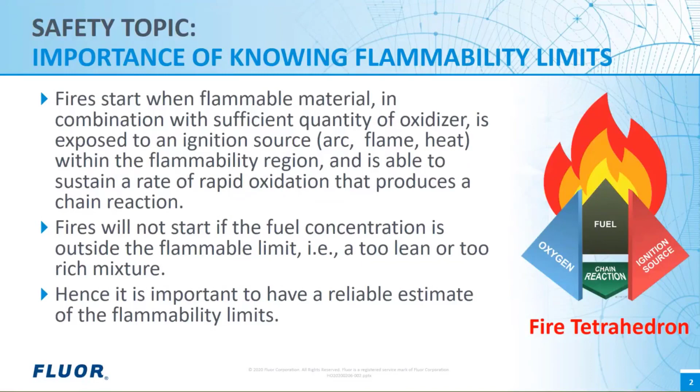This technical presentation highlights the value of accurate thermodynamic modeling on process design and safe and trouble-free operation. As safety is one of our core values at Fluor, we will start with a safety topic about the importance of knowing flammability limits. The fire tetrahedron has replaced the fire triangle to understand the ingredients necessary for most fires. A fire requires an ignition source, oxidizer, flammable material, and a chain reaction to sustain the oxidation. The concept of flammability limit is important to understand because fires will not start if the fuel concentration is outside the flammability region. Our speaker, Paul Mathias, will talk more about flammability limits in his presentation shortly.

Paul Mathias is a chemical engineer with over 41 years of broad experience and an expert in applied thermodynamics and process modeling. He started his career on the Aspen project at MIT, which developed the forerunner to Aspen Plus. He worked at Aspen Technology before joining Fluor in 2005, and Paul has chaired sessions at the American Institute of Chemical Engineers and other technical meetings, and was selected as an AICHE Fellow in 2015. Paul is also a Fluor Senior Fellow and has 6 patents, over 90 publications, and has given over 130 technical presentations.

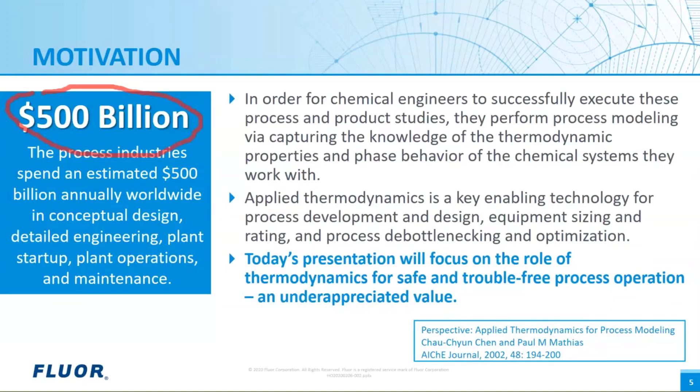In today's webinar, we will present 3 case studies to highlight the role of applied thermodynamics in achieving safe and trouble-free process operation. In the conclusion section of our 2002 perspective, Chau-Chyun Chen and I wrote that applied thermodynamics will continue to provide value to chemical engineering by focusing on the needs of practicing engineers. We chose these 3 examples as we feel they will be of interest to practicing engineers.

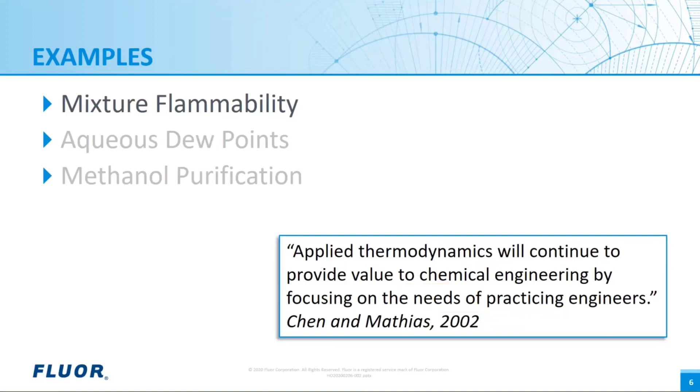Let's now move on to the first case, which is the study of mixture flammability. Fluor received this query from a client to evaluate the flammability risk of a fairly large lab reactor developed for the purposes of desulfurization research. Although it is a lab reactor, it is quite large. 100 gallons is about 7 times the average fuel tank capacity of an automobile.

The liquid the client told us was kerosene. And when we asked what kerosene, they said, well, it's kerosene. And so that pointed out to us that we needed to be conservative. The temperature in the reactor is 70 to 80 Celsius, and the desulfurization agent is hydrogen peroxide, which causes elevated oxygen levels in the headspace. This could be 27 to 28 mole percent, but possibly as high as 30 to 60 mole percent. And the vessel was closed when we started this study.

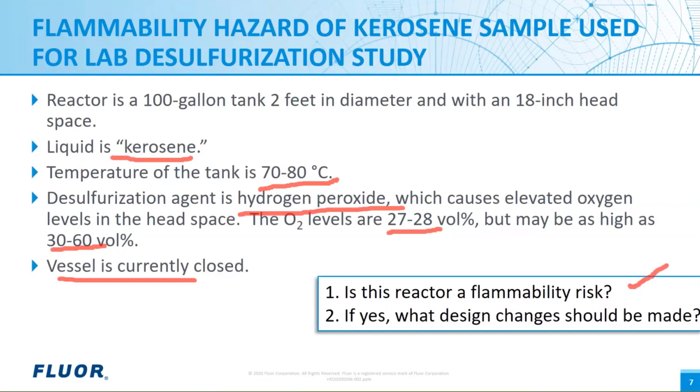So we had two questions before us. One, is this vessel a flammability risk? And the second one is, if it is, what design changes should be made? Flammability is a complex subject and has many definitions and technical terms. Here we focus on just two important properties, the flash point and the low flammability limit.

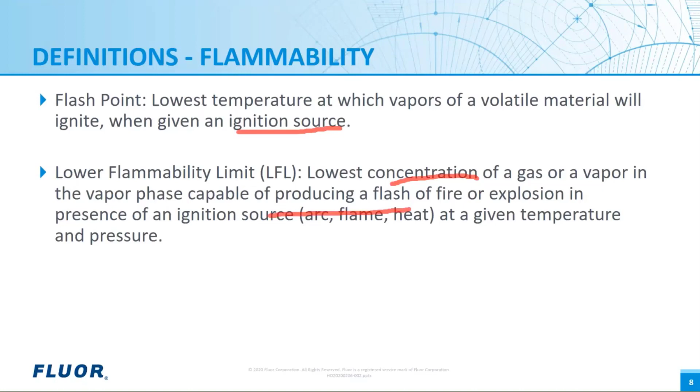The flash point is the lowest temperature at which vapors of a volatile material will ignite when given an ignition source. The low flammability limit defines concentration, so it is the lowest concentration of the gas or vapor capable of producing a flash of fire or explosion in the presence of the ignition source at a given temperature and pressure.

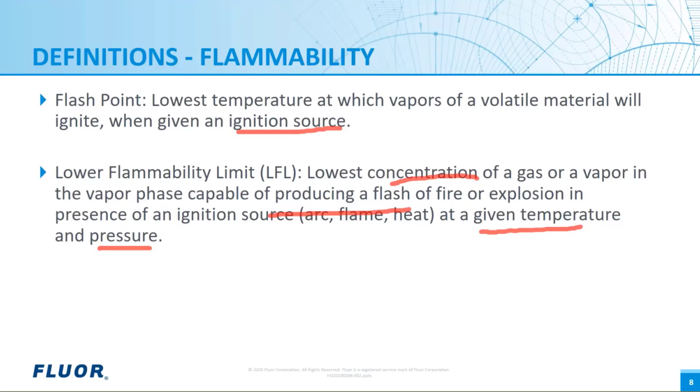This was the concept that Sabrina introduced to us. The approach taken in this study was to estimate the LFL and make sure it is much lower, actually 4 or 5 times lower, than the concentration of flammable kerosene components in the headspace of the reactor.

How do we estimate the flash point and LFL? This slide defines how we estimate the flash point. Our guiding principle in estimation is to use data as much as possible.

We describe kerosene as a mixture of N-alkanes, known compounds, and we got the flash points from the DIPPR database. That means the flash points for the pure components are accurate.

We now need to move to the estimation of the mixture flash point temperature. This equation actually has a long history. It was proposed by Le Chatelier in 1891, almost 130 years ago.

The numerator is Pi, the partial pressures, calculated by doing a vapor-liquid equilibrium or a flash calculation. That's an independent calculation, but for kerosene that should be rather simple.

The denominator is the vapor pressure of the pure component at its flash point temperature. You can see this equation is reasonable if you look at the pure component limit, because Pi would equal the vapor pressure, the denominator. So if we apply the temperature of the flash point, we get 1, and the equation is satisfied.

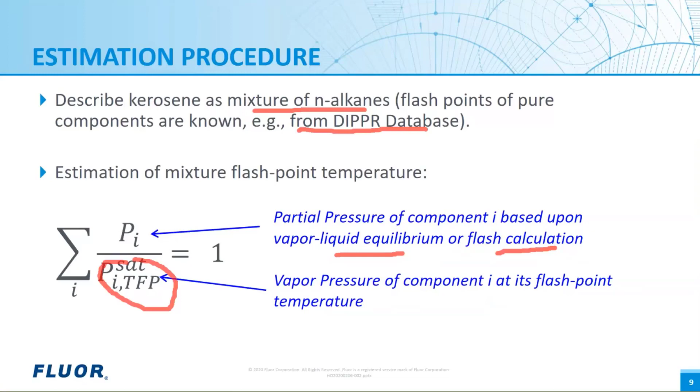This equation has been evaluated in lots of publications, and it turns out to be quite accurate. So in summary, the estimations are expected to be accurate if, one, the flash points of the pure components are known, which we know they are, and two, the phase equilibrium can be reliably calculated.

I want to let you know that this is a relatively small correction, but as I'll show you later, the effect of temperature actually shows up because it sharply increases the concentration of the kerosene components in the headspace of the reactor.

The second thing we need to estimate is what the oxygen level does. Somewhat surprisingly, it turns out that higher oxygen levels do not considerably decrease the LFL concentration, so we assume there is no effect.

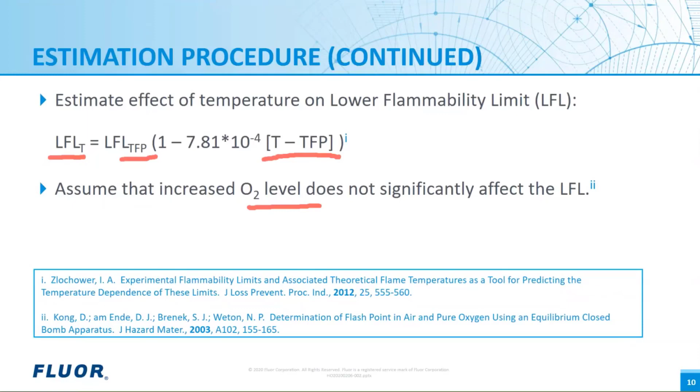Now that we have our estimation procedures done, the next thing is, what is the composition of the kerosene? That's defined in this next slide. As I mentioned before, there is a need to be conservative because we didn't know exactly what kerosene our client was using, so we came up with two.

Kerosene 1 is higher boiling, and you can see it has a higher flash point temperature, about 73 Celsius. Kerosene 2 is another valid kerosene but with lower boiling points. You can see it starts to boil at about 100 Celsius and is completely boiled by something over 200 Celsius.

You can see that makes a considerable difference in the flash point temperature, as it drops from 73 to 31 Celsius. Kerosene 3 is just something we thought would go in the middle.

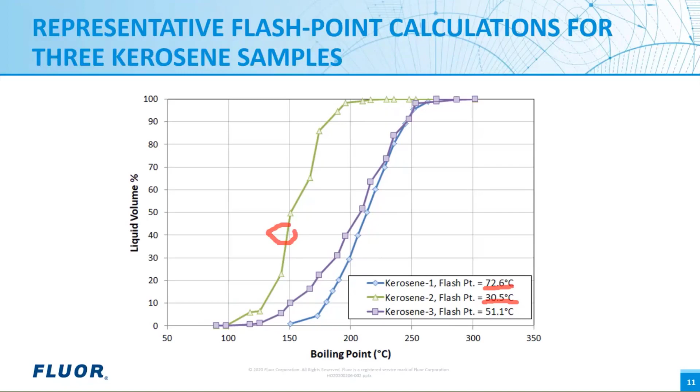Now that we have our kerosenes, we still need to evaluate how well the model works, in particular how well the model captures the composition dependence of the kerosene. In the next slide, we showed these effects.

As you probably know, it is absolutely vital to validate all models used. The first chart on the left shows the effect of adding N-pentane to our kerosene 3 shown on the previous slide. Generally, we expect that as you add a lighter component, the flash point temperature would go down.

You see that if you add about 2 mole% pentane to kerosene, the flash point temperature decreases by about 30 Celsius. The important point I want to leave you with is that our estimation procedure captures this effect very well.

On the right, we show another example, where nonane, again a lighter component, is added to tetradecane. Even half a mole% could drop the flash point by a good 60 Celsius. And again, the model captures it.

I want to leave you with the message, though, that's something we do, and probably you do too: you must validate the models used.

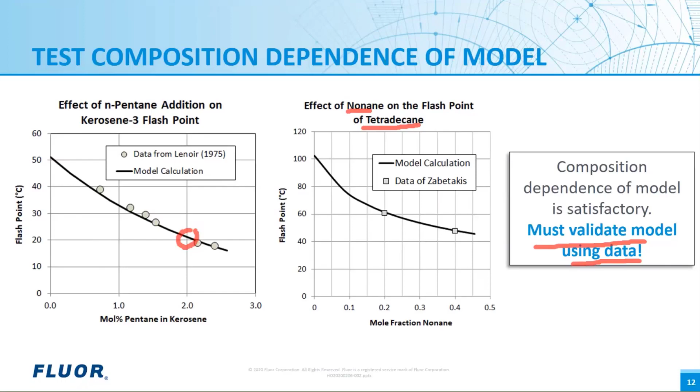We are thus confident that we can accurately and reliably estimate the flash points and the lower flammability limit of the kerosene sample. We can then go on to do the calculations and provide a results table to our client.

We have kerosene 1, 2, and 3. As I've shown you before, their flash point temperatures vary from 31 Celsius to 73 Celsius. From our flash calculation, we can calculate the mole% of these kerosene components in the headspace.

And then we can calculate the lower flammability limit at the flash point temperature, pardon me. And then we apply the temperature correction to find the lower flammability limit at the temperatures of interest.

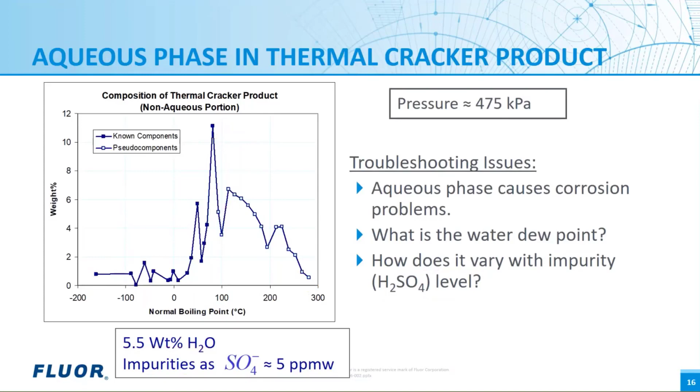This is a rather complicated system, but fortunately we have a reliable model for systems containing hydrocarbons and sulfuric acid. We did lots and lots of calculations to understand the phase behavior of the systems. One point I'd like to make, which you probably understand as well, is that a good thermodynamic model can serve very nicely as a virtual laboratory.

So the question is, is this correct? Well, we did a lot of analysis and we concluded that it is indeed correct. And the explanation is actually quite simple.

Imagine we are at 200 Celsius. There is no water vapor phase—there is a hydrocarbon vapor phase and a hydrocarbon liquid phase. As you drop the temperature below 200, some of the hydrocarbon components will condense, but the water essentially will not condense because it's got nowhere to go. The solubility of water in hydrocarbons is very low, and for all practical purposes can almost be thought to be zero.

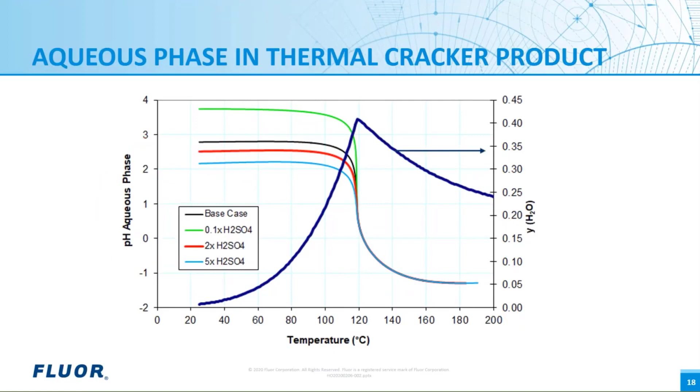So the message I'd like to leave you with is that small amounts of sulfuric acid, or another strong acid, can create a great deal of problems.

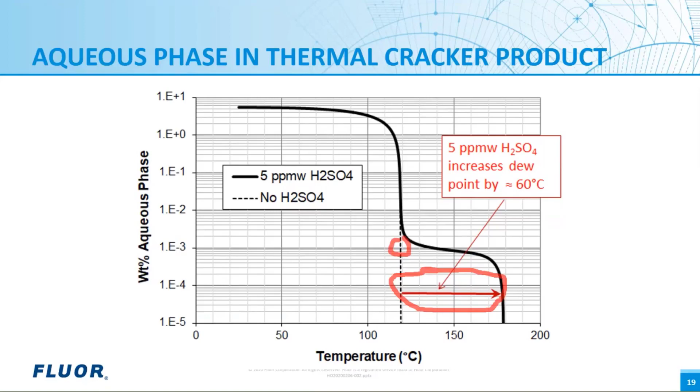Let me summarize what I've told you about. First, as I've emphasized before and will continue to emphasize, the validity and accuracy of the model is something we as practicing engineers must pay attention to. Calculations have expected trends and are therefore expected to be at least qualitatively accurate. We know the water dew point without acid is good because it mainly depends on the vapor pressure of water, which we know very well.

The pH calculations reinforce the VLLE, or vapor liquid liquid equilibrium, calculations and also provide an indicator of the sulfuric acid concentration. Lastly, what is the uncertainty? As a very conservative estimate, we feel the calculation of the elevation is good to say 10 to 25. That's probably overly conservative, because our model for sulfuric acid is good.

That gets us to problem mitigation. The first is to be cautious. Like I replied to the previous question from the chat, will we get a fire when we are within the flammability region if there's no spark? I don't know, but let's be cautious. Let's have sufficient temperature margin.

A second mitigation step is possibly to reduce the organic oxygen that causes the formation of H2SO4 from sulfur compounds. But again, I want to caution you that even very, very low levels of sulfuric acid cause a considerable increase in dew point.

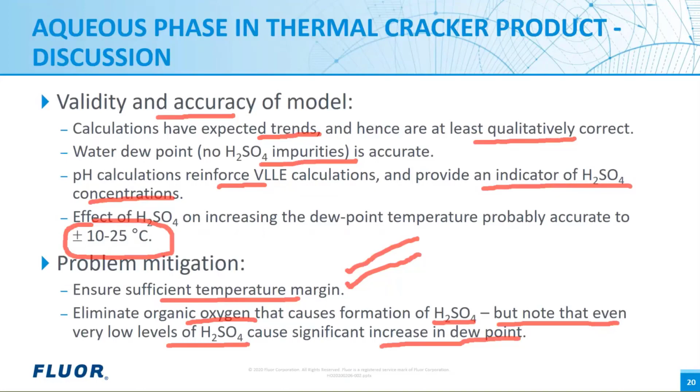I want to give you one related example next, just to show you that this is not really an isolated example. I'm going to show you the dew point elevation when we have a slightly different system. In this case, we have HCl, which is a strong acid, and ammonia, which is a weak base. And as you probably know, when you have the two together, you have very strong interaction between them.

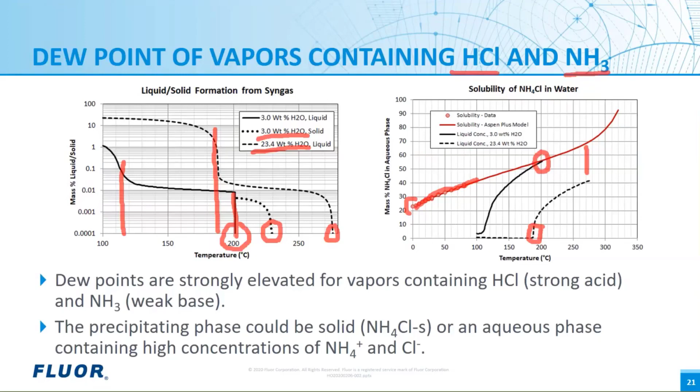And I really wanted to emphasize these points in the conclusion to the second case study. One is small concentrations of acids and bases can significantly elevate the water dew point. And it is important for us as practicing engineers to quantitatively understand this effect to mitigate two problems: corrosion and fouling.

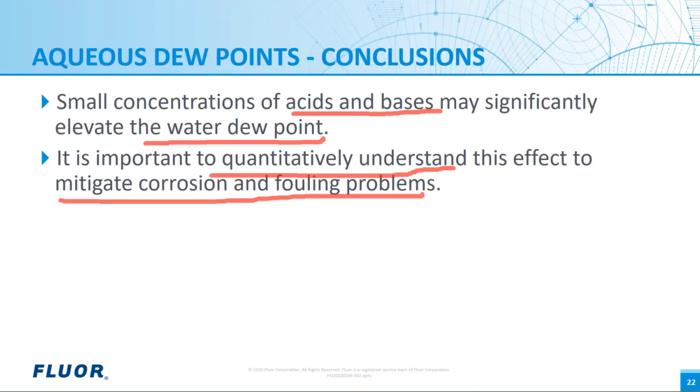With that, Sabrina, I think that concludes the second case study, and we can go and see whether we have any questions from the chat. Thanks, Paul. Yes, we do have a couple of questions from the chat. So the first one is, how are electrolyte systems modeled?

Okay, that's a good question, because that comes into case for sulfuric acid as well as the next one, which is ammonium chloride. We've been modeling electrolytes with process simulators going back, I would say, 50 years. An early pioneer in this business was a company called OLI Systems, which is based in New Jersey. My co-author, whom I talked about, Professor Chau-Chyun Chen, actually for his doctoral thesis at MIT, came up with the electrolyte NRTL model, which is in Aspen Plus, and we use this.

There are probably two aspects. Electrolytes, of course, are very complicated, but let me leave you with two important aspects. One is when you get electrolytes, they're ionic, they have long range forces, so the activity coefficients become complicated. More importantly, though, we need to figure out the dissociation constants. In the sulfuric acid example, we could have some molecular sulfuric acid in the system and also molecular water in addition to the ions. And the second example, we could have ammonium chloride in the system, which could precipitate as a solid.

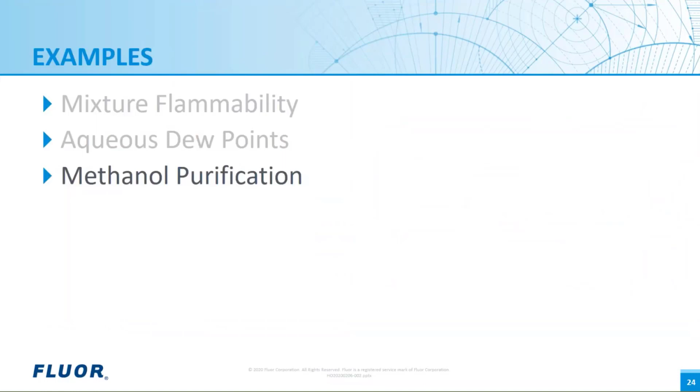This actually is a simpler system, and I brought it up because I think it highlights the need for us to carefully validate and verify our models. So let me get into this example. This came to me about 4 years ago, and I got a call from a process engineer. He was simulating a methanol refining column and was getting an ethanol impurity in the methanol product, which comes out as the distillate, of 25 ppm - and this would be a ppm by mass as opposed to the previous one I talked about - whereas the licensor said it should be 5 to 10 ppm.

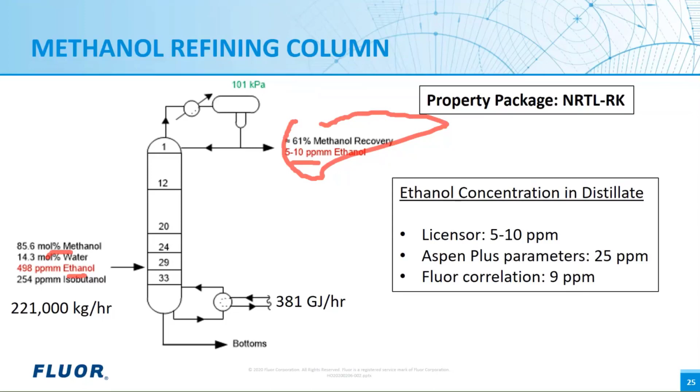Now this is a relatively simple system. Essentially what we are separating is a water-methanol system, and the ethanol has a very good relative volatility with methanol, so we should be modeling it correctly. But as I started to go into it, I realized that the details mattered, and in fact this is a case where we needed to be really accurate and verify our correlations carefully. So let me go into some of the details in the next slide, and maybe in the Q&A I can answer any questions you may have.

I want to point out that I published a paper on this subject just last year, so the viewers may go to this publication for details. But let me give you the key details.

The curve on the left here shows the liquid mole fraction of ethanol as a function of height of the column, or number of trays. I just want to point out that number 1 corresponds to the top, so the left is the top, and the bottom, tray 33, is the bottom, and the feed tray is tray 29. So you can see that in the top section, the two correlations work quite reasonably - they didn't make much difference. Here I'm talking about the original correlation that came from the vendor in the commercial simulator, in this case AspenTech, and the one that we developed, which I'll talk about in a minute. But as you get to the bottom of the column, you see that's where we see the difference between 9 ppm and 25 ppm.

In order to understand that difference, you go to the curve on the right, which shows the activity coefficient of ethanol. You can see here that the AspenTech correlation gives an activity coefficient of 1.08. The correlation we came up with gives an activity coefficient of 1.02. Both are actually pretty close to ideal, and the difference between the two is only about 6%, but it does make the difference. So the question is, what is the correct answer?

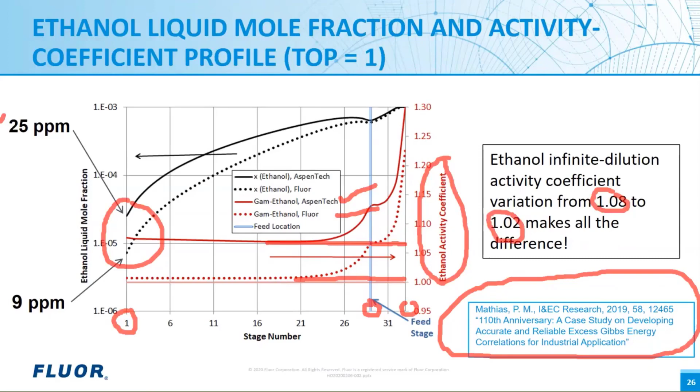Let's talk about the importance of the procedures and practices that we need to focus on in order to develop a reliable and accurate correlation. So let me talk about the ones that I consider important. One is, it's very important to have careful data analysis, and the best way to do this is trend plots - plot the data, look at it, compare, and see what it is. We human beings are actually very good at spotting trends, so I would encourage everybody to make trend plots and evaluate them - you will see problems right away. The second one, and you probably learned this in your thermodynamics course, is it's important to fit different kinds of data. In this case, it's important to fit the vapor-liquid equilibrium as well as the excess enthalpy data.

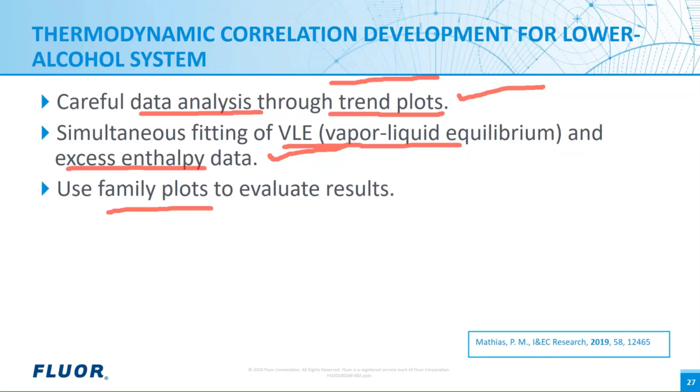And finally, a different twist on trend plots is family plots - properties within the family should have certain trends. I've published on this and can send you details. I also want to point out that I am a co-author of the latest edition of Perry's, and we put some of these patterns into section 4 on thermodynamics.

Let me move on to a discussion of details. This plot shows the methanol-ethanol relative volatility, which is the ratio of the K values, as a function of the ethanol liquid mole fraction at 1 atmosphere. Relative volatility is reasonably high, but the question is how accurate should it be? The green line shows our correlation, and it agrees quite nicely with the data we considered most accurate, Kur-1993.

It's also in quite good agreement with the data we call ARC 1998. Details on these data sets are in our paper. But through analysis, we concluded that the other two data sets are not accurate, and we did not include them in our data fitting.

We also included some excess enthalpy data, and I won't show details here. So we concluded that our green line is accurate. The dashed lines show 2% difference, and the dotted lines show 10% difference. Our analysis is that our correlation is probably good to 1 or 2% for ethanol-methanol, and that made all the difference in the previous slide which modeled the distillation column.

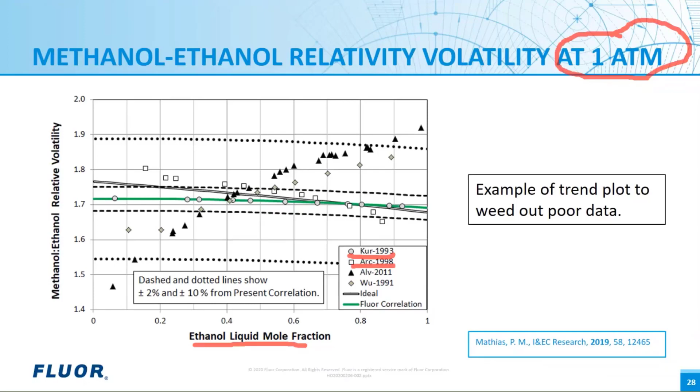Now, if you did plot them, you would look at it and say, well, this doesn't make any sense. So that's an advantage of a trend plot.

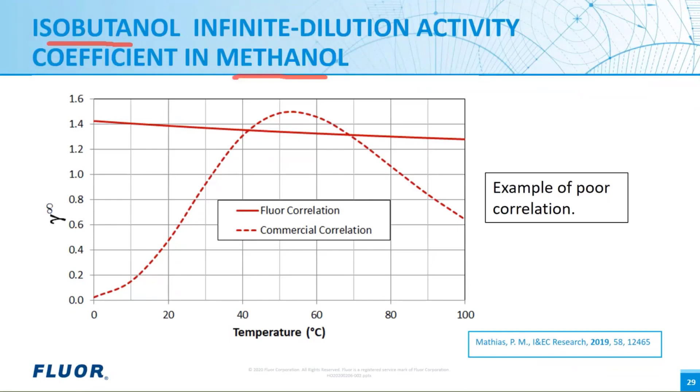When I started to get this trend, I went into the literature, and it turns out, like in most things in thermodynamics, somebody else had studied it. There's a gentleman named Dr. Benson, who worked out of Ottawa, Canada, who took a lot of very accurate heat of mixing data in the late 60s and early 70s. Through his data, he concluded that isopropanol, which is a secondary alcohol, has a favorable interaction with primary alcohols - methanol, ethanol, and propanol.

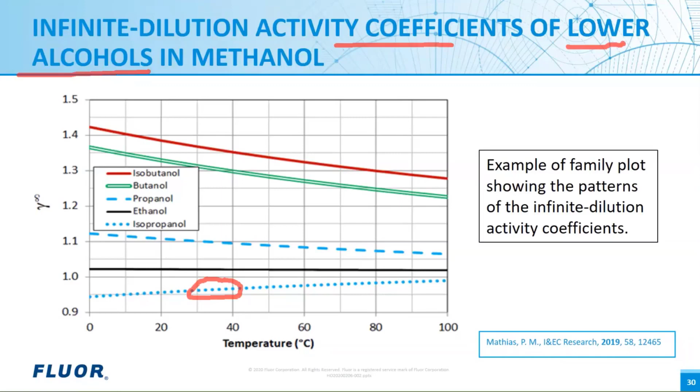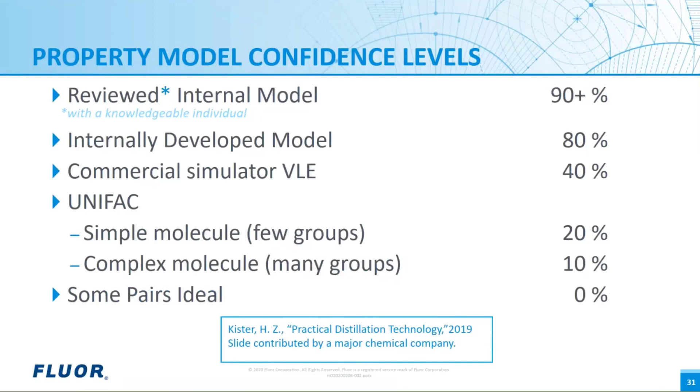Let me take a slight detour here and give you a next example that came from a different source. My colleague in the next office, or at least the next office before COVID-19 hit us, is Henry Kister. Henry Kister is a very distinguished distillation expert, and he has been providing this course, practical distillation, for more than 20 years, taught throughout the world.

When I showed him my paper, he said, 'I've actually been presenting a slide like this for a long time in my distillation course, and this slide was contributed by a major chemical company.' Let me quickly go over the slide. We don't have that much time.

The slide says that if you have a reviewed correlation, the confidence level is good, and hopefully the correlation I showed you for the low alcohols would be in this category. As you go down this list, the confidence level decreases. If it's not quite so much reviewed, maybe it's 80%. If it's a commercial simulator, it's possibly 40%, and that's what I found too. In defense of the commercial simulators, they're providing correlations without knowing where they will be used, and that's a very hard way to provide the correlation.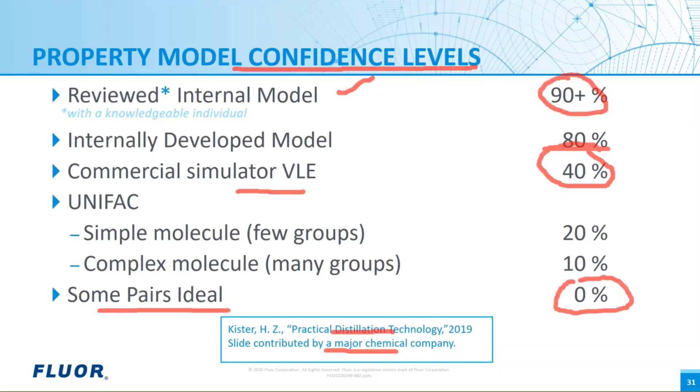On the other hand, we as practicing engineers know where it should be used, and therefore we should be doing a validation. As we move down the list, UNIFAC, which is a group contribution method, performs worse. And if you're very lazy and say that some pairs are ideal, you could be down in the 0 confidence limit. So let me quickly give you the lessons learned.

One is, the message I want to leave with you: correlations from process simulators need to be checked. Actually, we do have pretty good tools to develop correlations. We have databases—I mentioned the DIPPR database before, which applies to pure components. In addition, we have the NIST TDE, which I've used a lot because it's available in Aspen Plus, and also the Dechema database that comes from Germany.

It's one of the best databases in the world, and I've used that one too. So data is indeed available. Secondly, software to regress model parameters is easily available. If you know what data you can pick to regress, it's very easy to do the data regression. The point I want to leave you with, though, is correlations need to be checked for trends as well as family plots. And lastly, I believe this is what Henry advises people in his course too: please be skeptical. If you are using correlations, be skeptical, because all correlations do need to be verified.

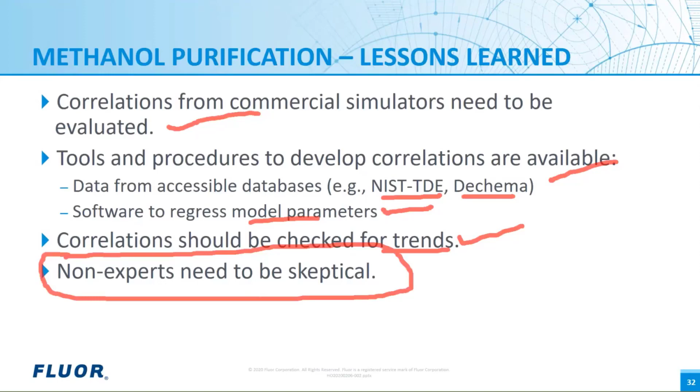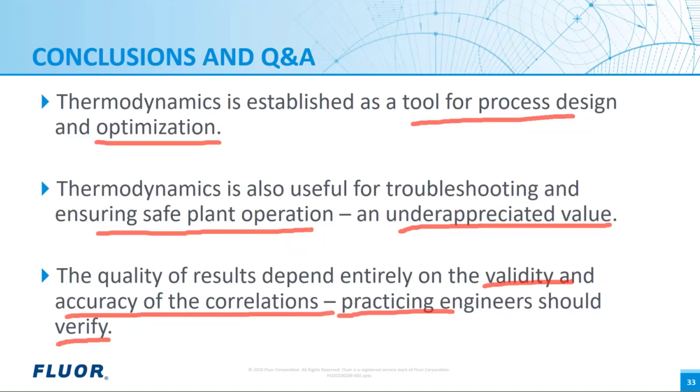I'd like to get to the conclusion after giving you 3 case studies for this webinar. One is that thermodynamics is indeed an established tool for process design and optimization. But I also wanted to make the point that it's good for ensuring safe plant operation, and in my estimation, this is an underappreciated value, so I wanted to emphasize it. Lastly, I want to re-emphasize the point I've made several times: the results depend entirely on the validity and accuracy of the correlations. So practicing engineers should verify. If you remember what President Ronald Reagan said: trust but verify. That's the last message I'd like to leave you with, and I think we have some time for questions. I hope you've sent some over the chat. Thank you.

Thanks, Paul. Yes, we've had a very engaged audience, and they have been submitting quite a few questions. Our first question is, how does Fluor use thermodynamic knowledge in its CO2 capture technology?

Okay, I did publish a paper on this subject at a 2013 or 2014 conference on thermodynamics. In fact, one of the examples we presented there was how thermodynamics helped us sort out the heat of solution. We went back, and one of our collaborators on that was Professor John O'Connell, who was my thesis advisor—at that time he was a professor at the University of Virginia. So we went back and reevaluated the Gibbs-Helmholtz equation and came up with how we could estimate the heat of solution. At that time, people were claiming a very, very low heat of solution for aqueous ammonia, and we proved that to be incorrect. That was later verified by experimental data.

But as far as how Fluor works on this, it's an area that's very important to us because it's one of our core technologies. We've developed a very good thermodynamic model using some of the procedures and practices I've talked about here. In addition, we've gone in and tried to verify the kinetics and the mass transfer. One thing I should mention is that this is another example of electrolytes, because these are chemical solvents and they are weak bases.